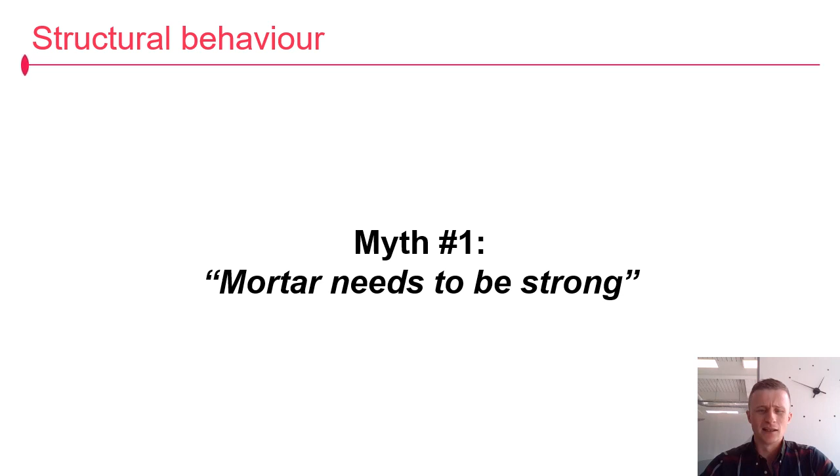Structural behaviour. I want to debunk a couple of myths along the way. So myth number 1, the mortars need to be strong. Okay, engineers, I am aware, get a bad name for this in the conservation business. Now, I want to draw the distinction between the structural behaviour of old buildings and new buildings. Old buildings draw strength and stability from their shape and mass. So in response to destabilising forces, it's just their weight arranged into a stable form that's keeping them standing up.

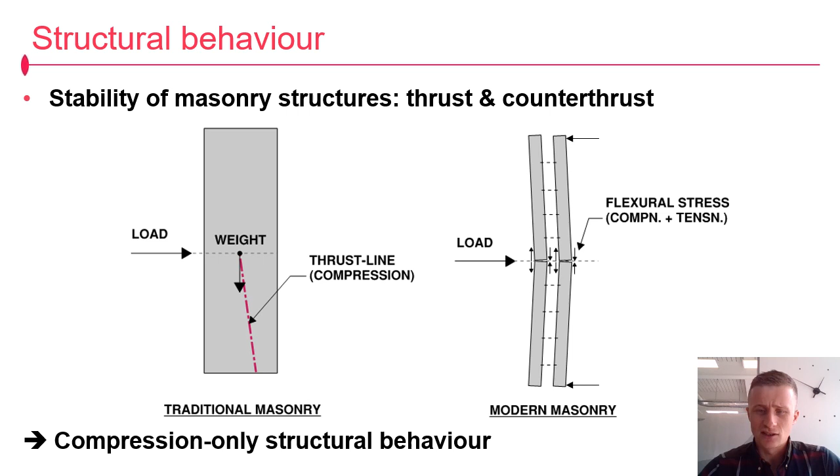Okay, so the internal forces are all compression based. No tension, no flexural stress. Distinction with modern masonry buildings, essentially the walls work like thin reinforced concrete slabs on their side. So in response to destabilising forces, they need to develop tension across the mortar joints to create flexural resistance. Okay, so the role of the mortar joint is totally different from old buildings to new buildings. Old buildings just to keep the bricks apart, whereas in new buildings it's to stick the bricks together. Okay, so big distinction in the role of the mortar joint.

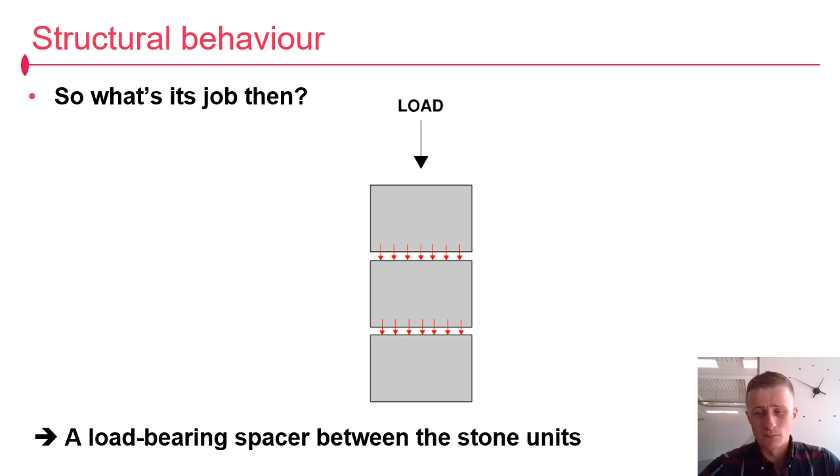So if it's not sticking the bricks together, which it absolutely is not, it's just a load bearing spacer between the stone units to prevent them from point contacting one another and splitting. Okay, now traditional lime mortar, spectacularly weak, of the order of 1 to 2 Newton per square millimetre. That's for our friends across the pond, that's somewhere between 150 and 300 psi. Okay, so low strength, which sort of invites the question, with such low strength mortars, how are our old buildings standing up?

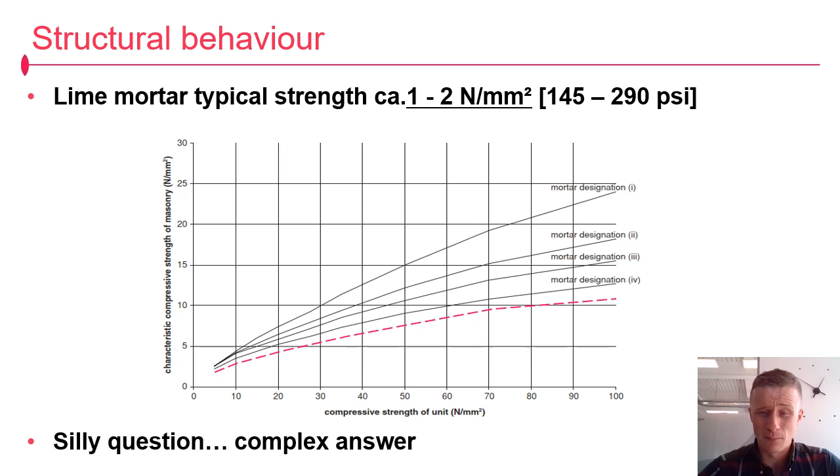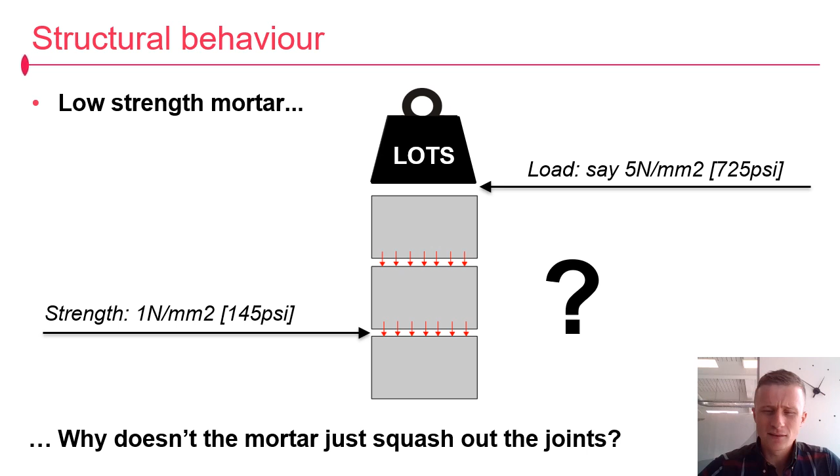Now, when you look at the strength curves for the code of practice for load bearing masonry, you'll find that for a weak mortar, you can get very strong masonry as an overall assemblage. And the wee pink one is what I've idealised for what a traditional hot mixed lime mortar might be. Now, you'll find that for very weak mortar, you get ample strength out of your masonry, and you're thinking, where does this come from? So when you look at the stress transmission across the mortar joints, you're thinking, okay, well, if my mortar's only good for 1 Newton per square millimetre and I load it up with 5, why doesn't the mortar just squash out the joint? It's a silly question, but it's got a complex answer.

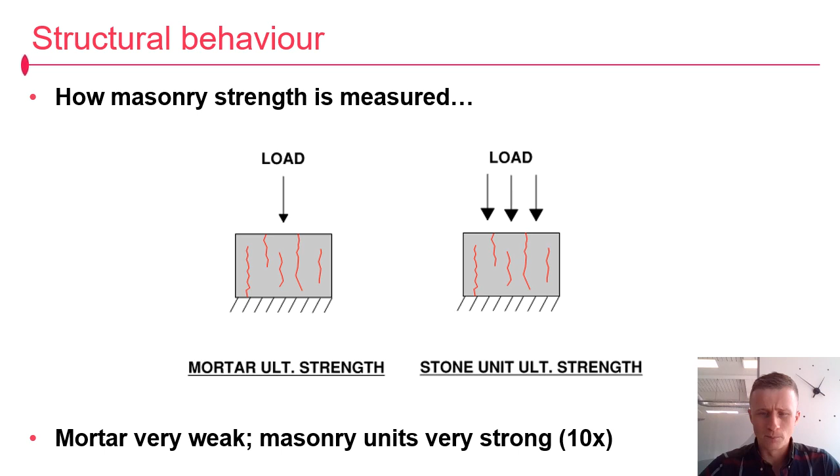Now, it pays to look at how the strength of masonry is measured. So if you cast a cube of mortar and load it up in a crushing rig, as it approaches its ultimate strength, it tears itself into vertical strips. And those vertical strips are wee side-by-side columns that then buckle. And when they buckle, it collapses. And that's the ultimate strength reached. Stone masonry units, similar process, but it's significantly higher strength. You're talking a clear order of magnitude between mortar and masonry unit. So, but it's a bit more complex than just the dilution of a weak material with a strong material. Like I said, the stress transmission through the joints, you're thinking, where does this go?

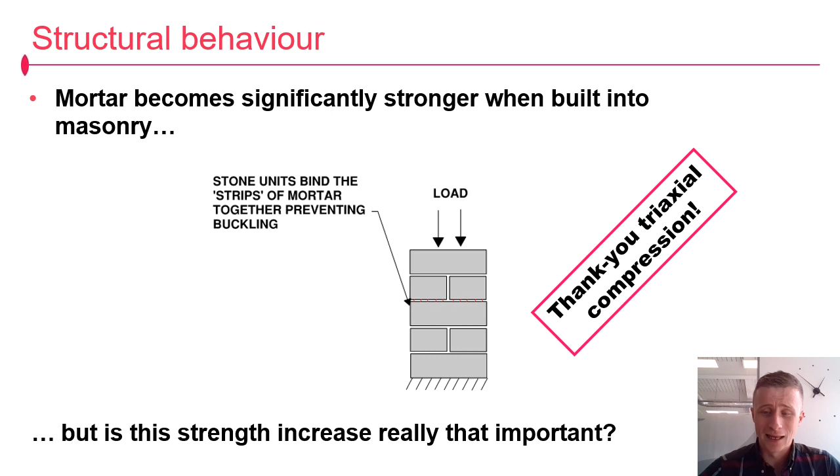Well, when you actually build mortar into masonry, the actual mortar strength in practice significantly increases, because each masonry unit laterally binds or clamps together the head of those wee columns that are trying to form, so they can't buckle. So the mortar is actually in a state of triaxial compression and can support significantly higher strength. So you can get very high strength masonry out of very low strength mortar. Okay, now, but is that high strength actually required?

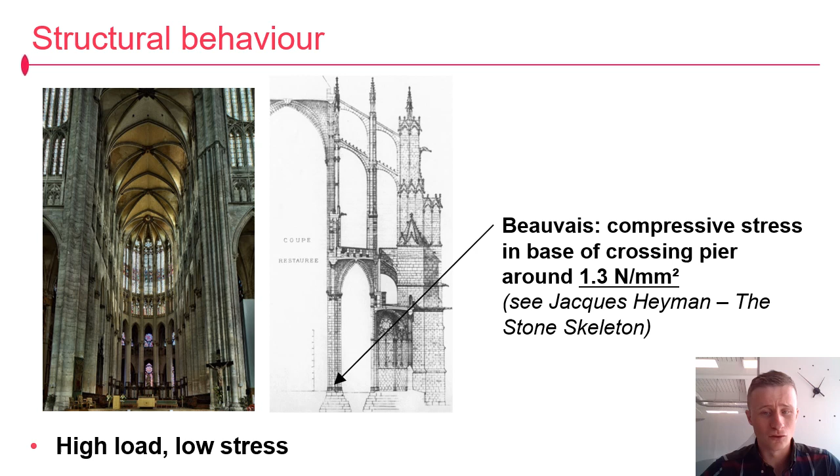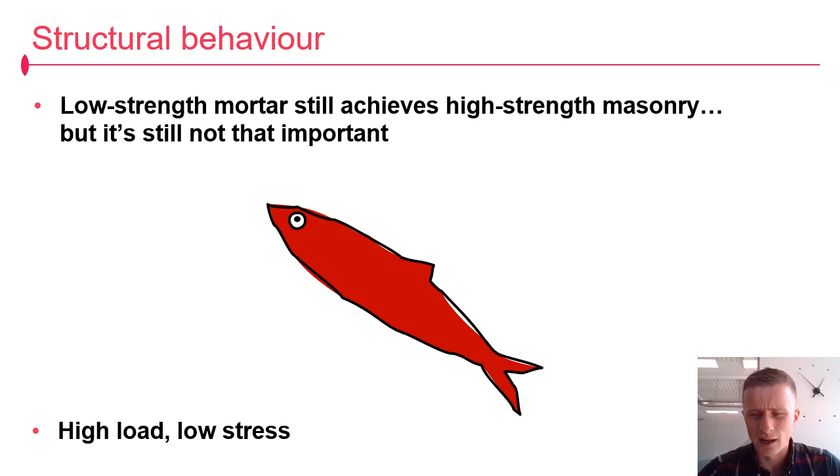Well, Gothic cathedrals are about as far as you can push load-bearing masonry as a structural material, and still, even in the highly loaded members like crossing piers, you're talking mean compressive stress very low, of the order of round about 1-2 Newton per square millimetre. So high load, low stress, thanks to the massive section area. Now, so you can get high strength masonry out of low strength mortar, but as we've seen, high load, low stress, thanks to the massive section area, strength still isn't that important. So it was a bit of a red herring to make the point. Okay, what is important about the structural behaviour of the mortar joints is its deformability. So that's the deformation modulus.

So the mortar is essentially a deformable cushion to allow the stonemasonry units to shuffle about to cope with nothing short of wanton destruction to the foundations. If you ever get the chance to visit our island, go to Carlisle Cathedral. It's an engineering playground for how arches work, and you can see the role of the mortar is essentially a deformable filler to keep the stones apart so that they can shuffle around to a stable form.

So from a structural engineering perspective, structural masonry is Lego bricks bedded in plasticine. So strength's not really that important. That's me, an engineering pariah now. The cat's out the bag, and I will be looking for new employment sometime soon.

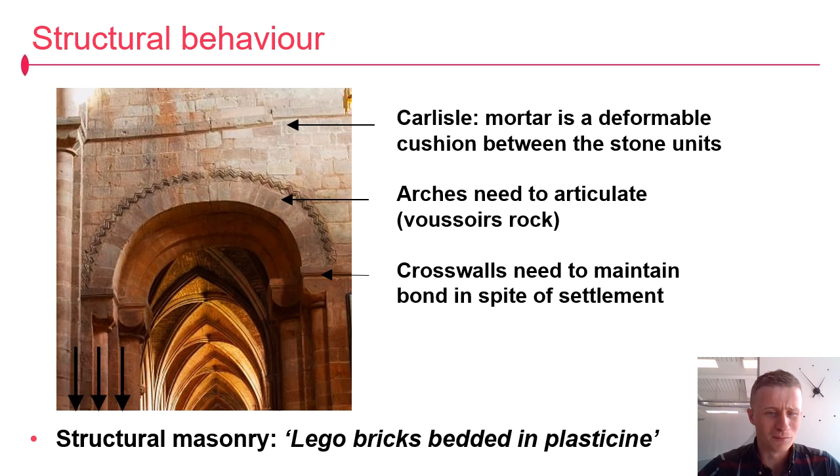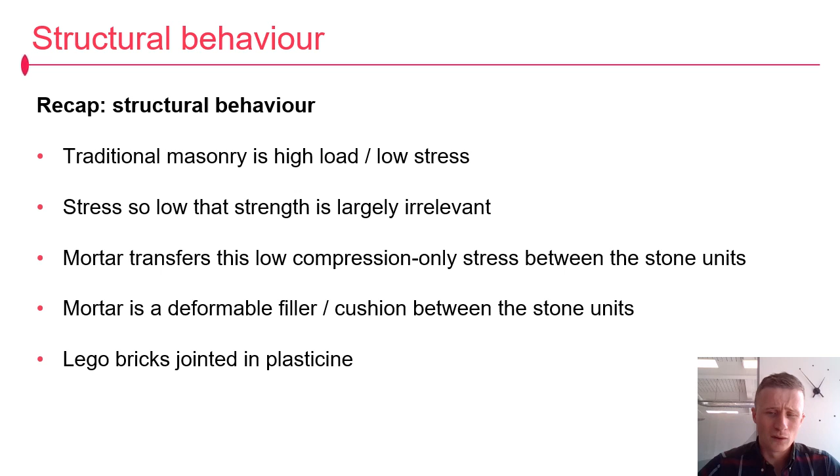So a quick recap on the structural behaviour. So traditional masonry: high load, low stress, stress so low that strength is a bit of a red herring, and we're looking at Lego bricks jointed in plasticine from a structural behaviour perspective.

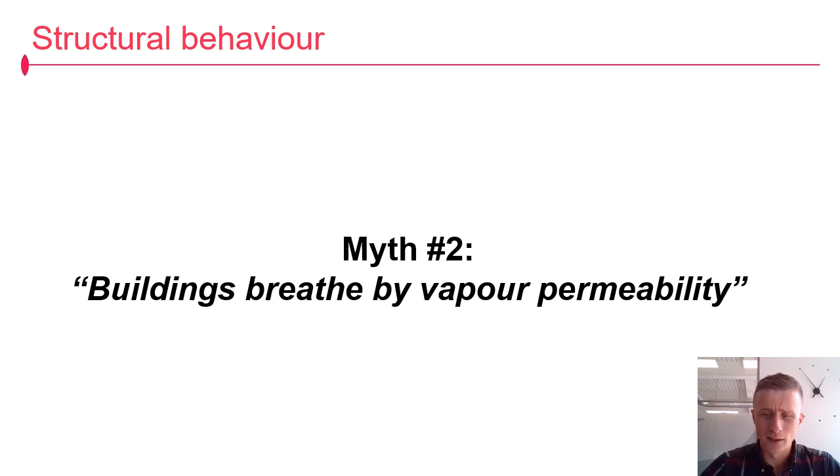Okay, weatherproof behaviour. So another myth that I want to debunk is that old buildings breathe by vapour permeability of the walling fabric. Vapour permeability is a terrible way of describing how old buildings breathe. I'll come back to this. So the small business of keeping the water out.

Now, I can only speak for us here, but as you might imagine, I'm from the west coast of Scotland. That's the dark blue bit there. When walls get wet, you're talking of the order of tens of tons of water every year incident on our masonry building walls. So that's a lot of water, and it's got to go somewhere.

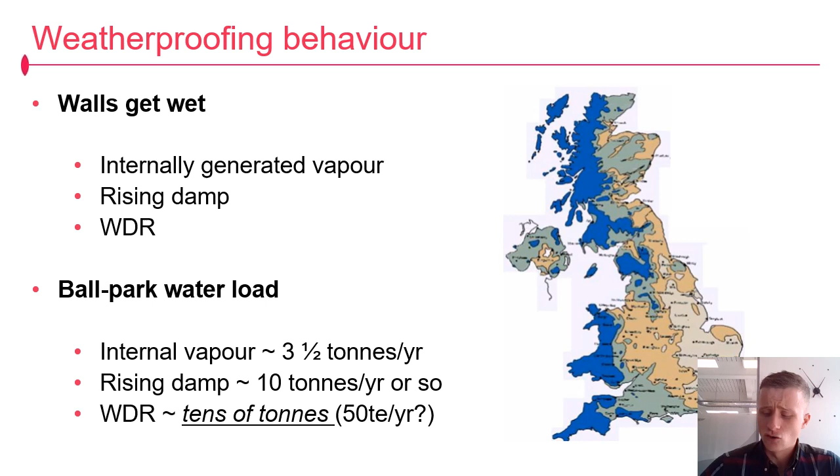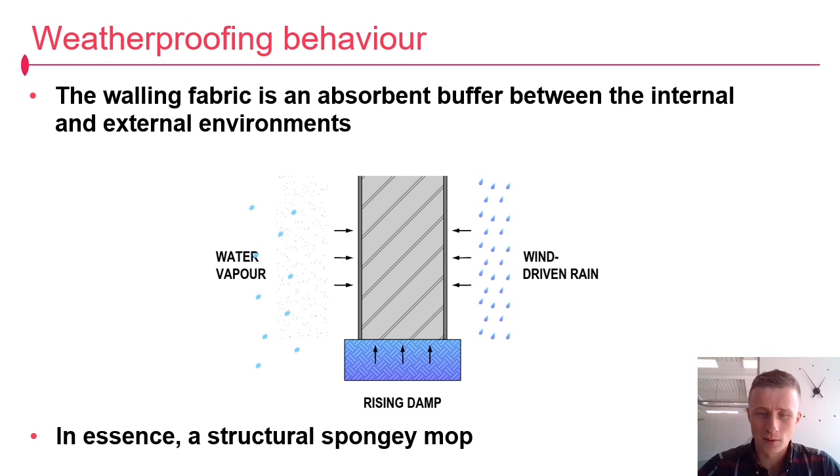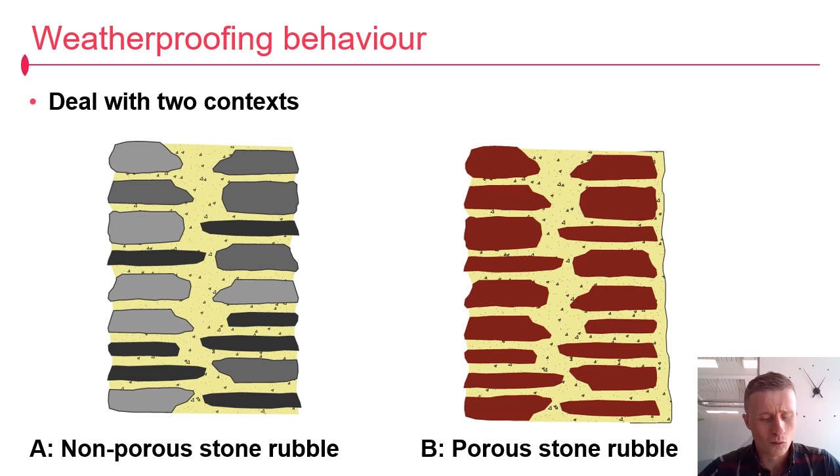Now, the walling fabric is essentially an absorbent buffer between inner and outer environments. So that's a thick mop to absorb, store, and discharge the water out to the external environment when conditions permit. It's that recharging cycle that I'm interested in here. So I'm going to deal with two contexts. Context A, we've got non-porous stone masonry, so granite rubble wall, bedded in traditional lime mortar. In context B, similar stone rubble wall, but with porous masonry units, so sandstone for talking sake.

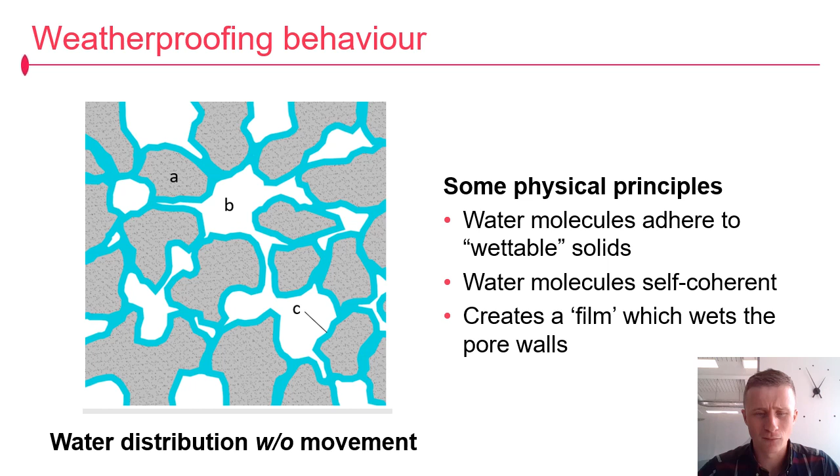Now, if those marbles were also attracted together, then you're looking at water molecules, so they're self-coherent, they're attracted to one another as well. Those two physical principles compete, and if you chuck a bucket of water on a block of dry sandstone, you'll find that the water tries to wet as much internal surface area as it can, so that's adhesion, whilst maintaining intermolecular connectivity, so cohesion. The outworking of that is it creates a film across the pore walls. At high moisture contents, that's a thick film. At low moisture contents, it's a thin film, but it tries to stay interconnected. Introduce a drying front to this and watch what happens.

So the principal driver behind the drying of wet stuff is wind blowing across the surface. Okay, so wind blowing across the surface physically removes water molecules from the front of the material. That opens up a bit of free space of wettable solid surface. The next magnetic marble in the queue bumps forward to stick to that, but because he's coherent to his pal behind him, he bumps forward as well, sticking to him, and the whole chain of marbles starts to roll through the material towards the drying front. That's capillary drying, okay, non-saturated capillary flow towards a drying front.

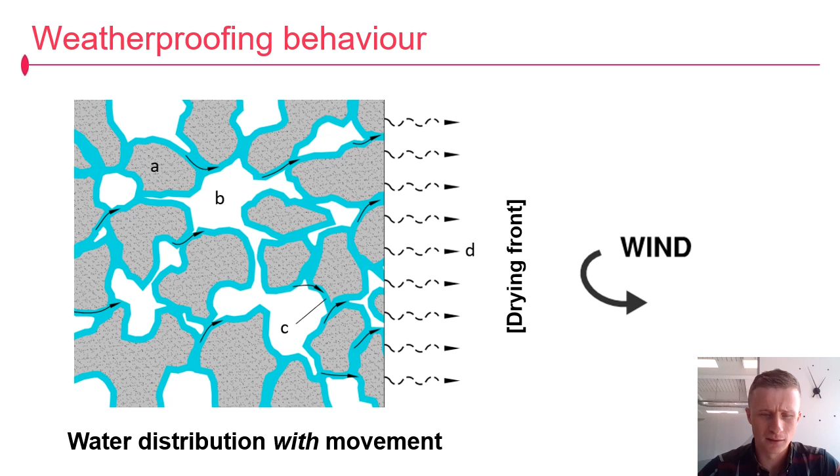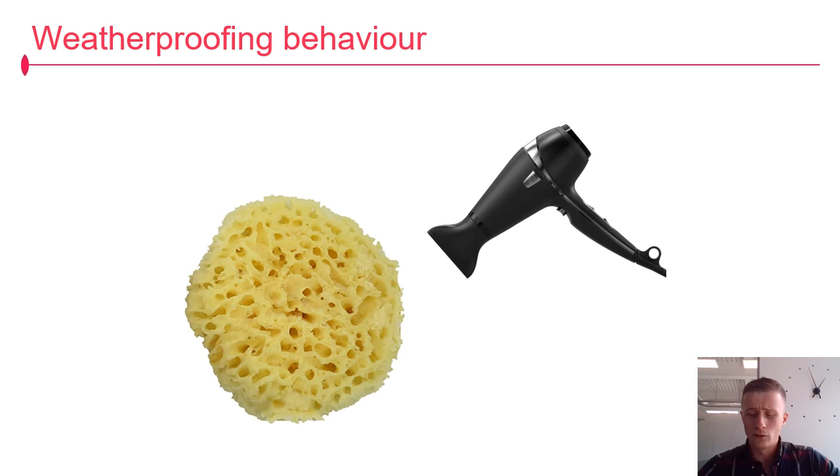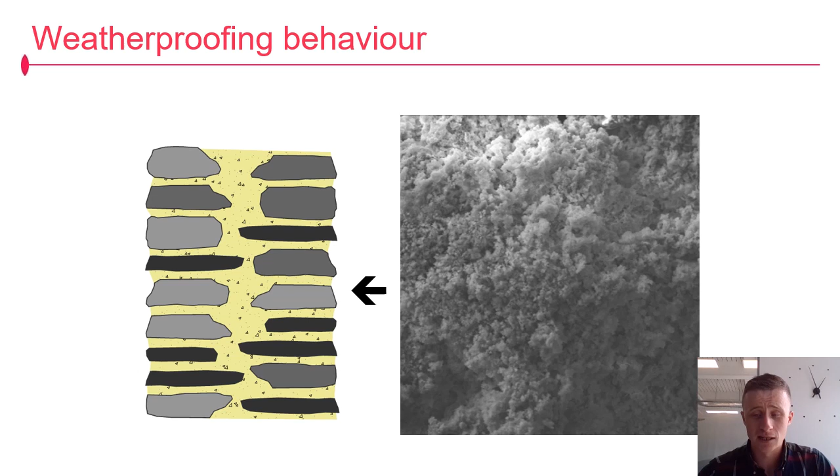In other words, you take a wet sponge and blow a cool hairdryer across the surface of it, you'll find the whole sponge dries out, not just the surface, and that's because you get capillary flow through the material. When you look at lime mortar on a powerful enough microscope, it looks suspiciously like a sponge. So essentially you've got a load-bearing structural sponge built into the wall with a cold hairdryer blowing across the outer surface. That's what's happening. Non-saturated capillary flow, convective drying.

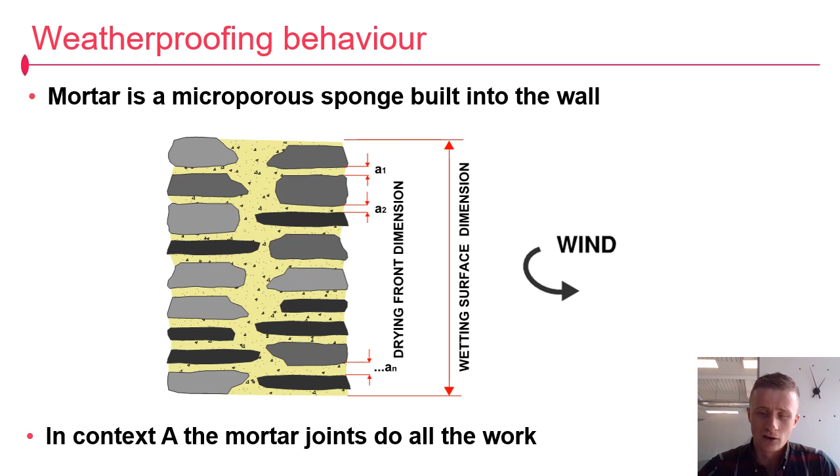Now, the wall gets wet according to its total area, but it can only dry in this context according to the total surface area of the lime mortar joint. So the lime mortar has to work hard, so it needs to be thick enough to store all that water, and then work hard to discharge that water out to the external environment. Scenario B, a sandstone wall with a good lime harling.

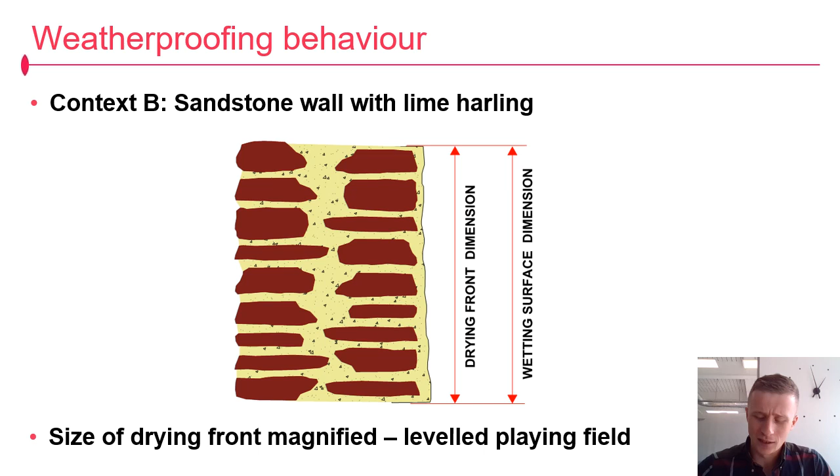So you've now levelled the playing field between the propensity of the wall to get wet and its ability to dry back out. So significantly enhanced the drying capability. But there's more going on there, so we'll probe poultice mechanics in a wee minute. But essentially, a fine pored material will soak water out of a coarse pored material into itself. So that's like drawing the body of water out of the coarse pores into itself, closer towards the drying front. It also keeps the coarse pored material drier for longer.

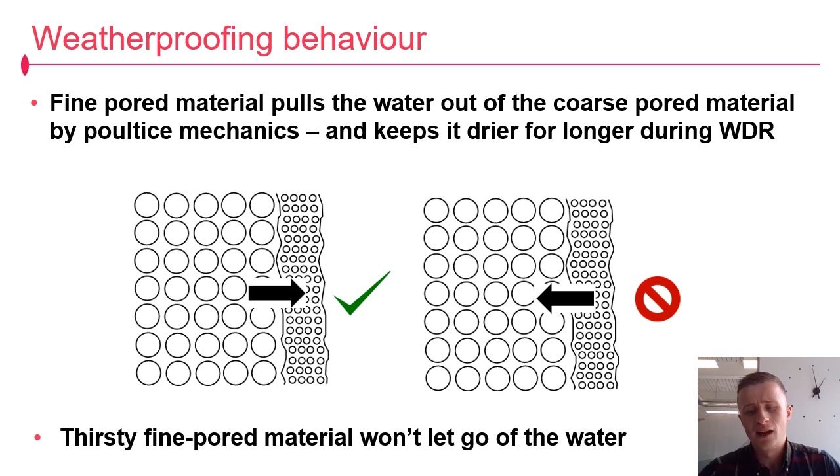If you cover a coarse pored material with a fine pored material, the fine pored material is the one that's getting wet, and it doesn't want to let go of the water into the coarse pored material, by those same poultice mechanics. So it's right at the front of the material when the wind keeps blowing but the rain stops, ready to dry back out. So harling, the prime culmination of poultice principles, is key.

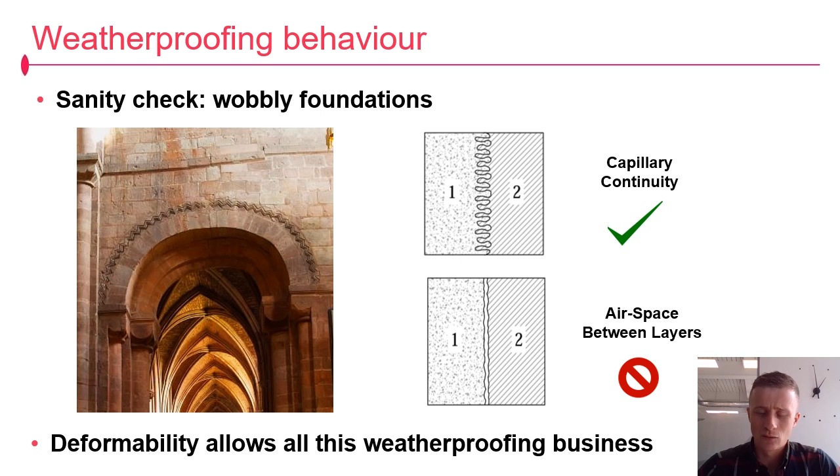Now, this weatherproofing business is intimately tied to its ability to deform. So the mechanical characteristics and the weatherproofing characteristics are intimately linked. Okay, so you need to maintain capillary continuity between your stones and your mortar and throughout the body of mortar for all this business to work properly. You do not want a brittle material between your stones, because that will snap and create airspace, which massively impedes the water movement through the material.

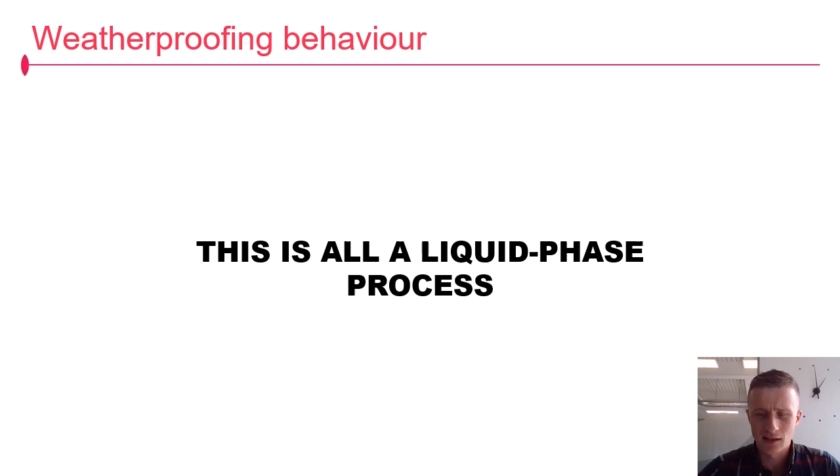Now, you'll notice this is all a water movement process, liquid phase. It's not a vapor phase process at all. Now, the business of vapor permeability is an absolute nonsense. It's a terrible way of describing how old buildings breathe. Old buildings breathe by convective drying.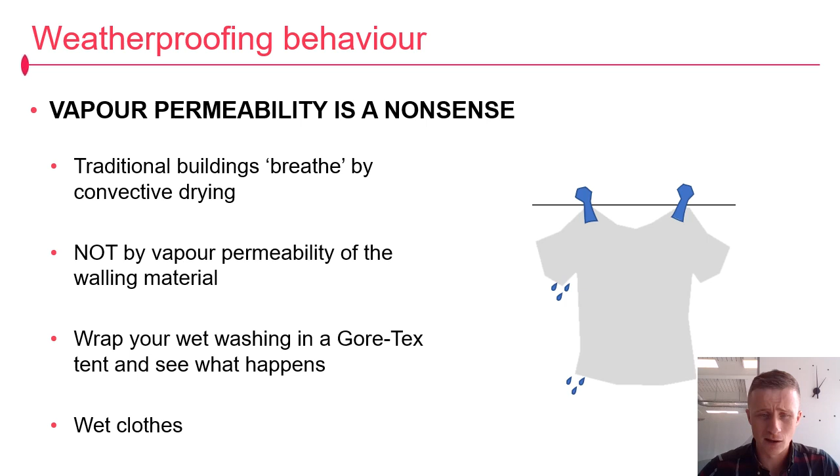So the proof test of this is if you take your wet clothes out of the washing machine, hang them up on the washing line, and for academic purposes decide to erect a Gore-Tex tent around them, what would you find? Well, Gore-Tex, fantastic material for hill walking and so on and so forth, waterproof, but it's windproof. And whilst it's highly vapor permeable, because it's windproof, it starves the wet material of access to the favourable evaporation conditions, i.e. inhibits the wind flow blowing across the surface. So lo and behold, wet clothes. Any backpacker knows that it's really difficult to get your wet kit to dry on the inside of a tent.

Okay, so quick recap on weatherproofing behaviour. So solid wall, just an absorbent buffer. It's a holding tank, a spongy mop to soak up, hold and discharge the water out. And it does this in a convective drying capillary flow, not vapor permeability. Okay, harling being the prime culmination of that process.

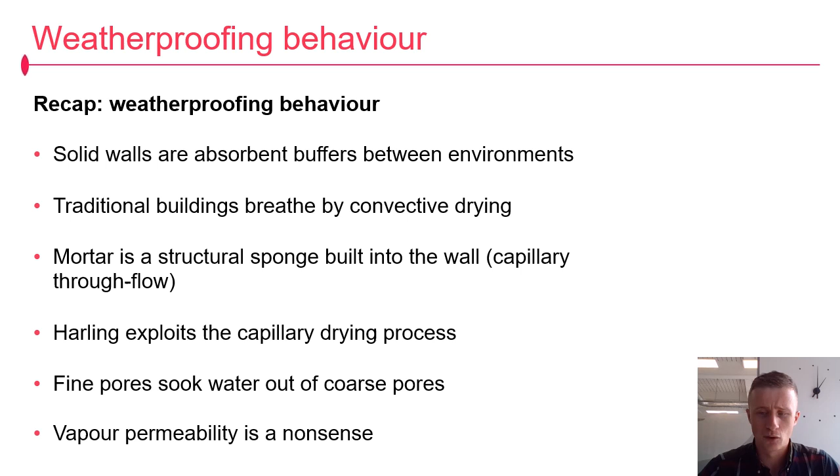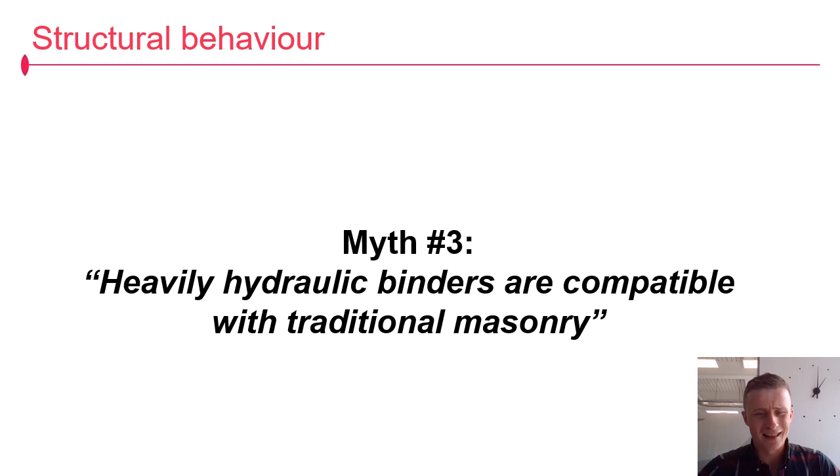Okay, sacrificiality. Now, this is the masonry conservation holy grail. Now, another myth I want to debunk here is that heavily hydraulic binders are compatible with traditional masonry. Okay, so lime mortar is grappling with moisture, the engine of decay, but how does it preserve the stone masonry units? Now, in the UK, the principal agent of decay is salt attack, not frost attack. Now, salts are harmless in solution, but when the body of water that the salt's dissolved in then evaporates is where it causes its damage.

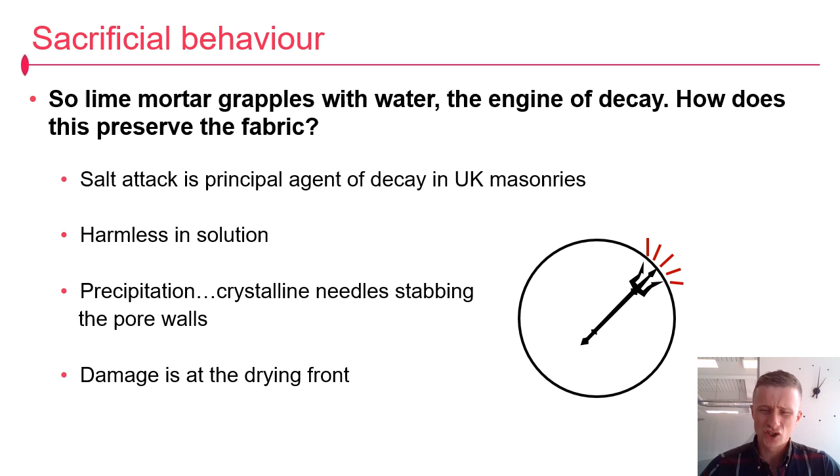So the salt ions crystallise and create wee needles, like wee spears, stabbing the pore walls, breaking down that mineral binder, essentially turning an engineering strength sandstone into mush you can poke your finger into. So it's a big problem. Now, the SPAB had a key insight into this. That's the Society for the Protection of Ancient Buildings.

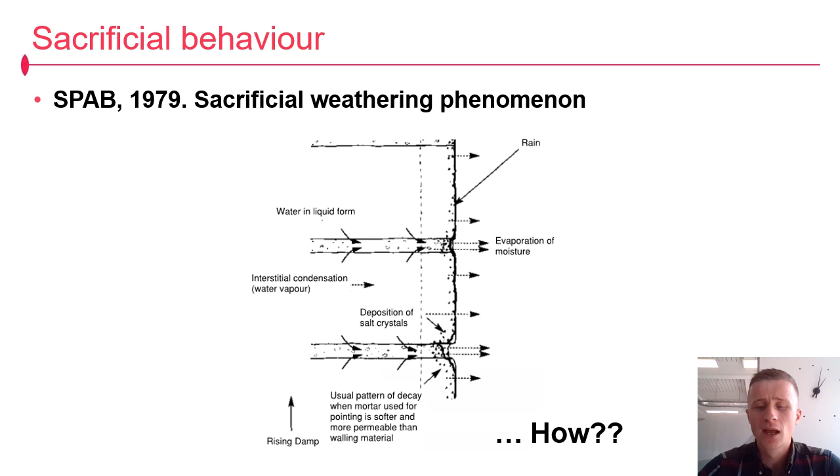In 1979 they published their findings on observations of masonry structures as they dried after periods of wind-driven rain. They noticed that the lime mortar joints appeared to soak the water out of the masonry units and into the lime joints, where the bulk of evaporation took place, and then lo and behold, that's where the salt crystals were deposited. The Eureka light bulb went on, penny dropped, and this was dubbed the sacrificial weathering phenomenon. How does this work? Okay, so when you've got two porous materials of distinctly different pore size in intimate contact with one another and chuck a bucket of water on that, you have a poultice.

So water is preferentially drawn out of coarse pores into fine pores by those same capillary mechanics we've seen earlier on. Okay, now, with the moving water come the soluble salts, and this is mobilised by wetting and drying cycles, and we get those several times a day on the west coast of Scotland. And over the lengthy lifetimes of masonry structures, you get an incredibly pronounced salt management process.

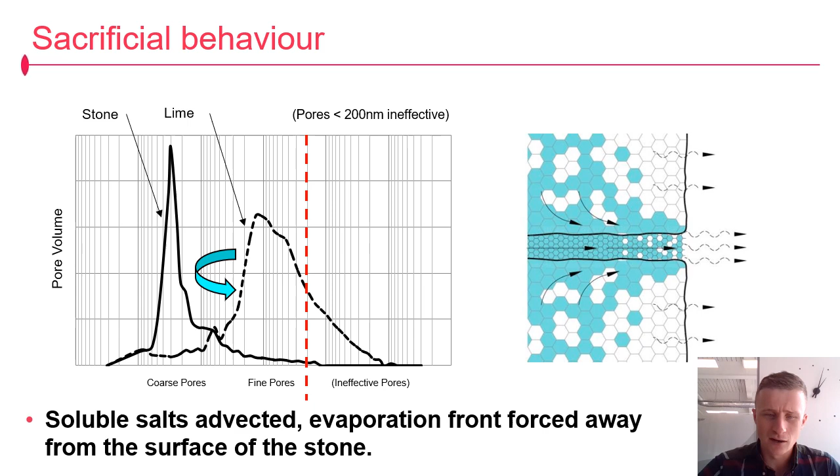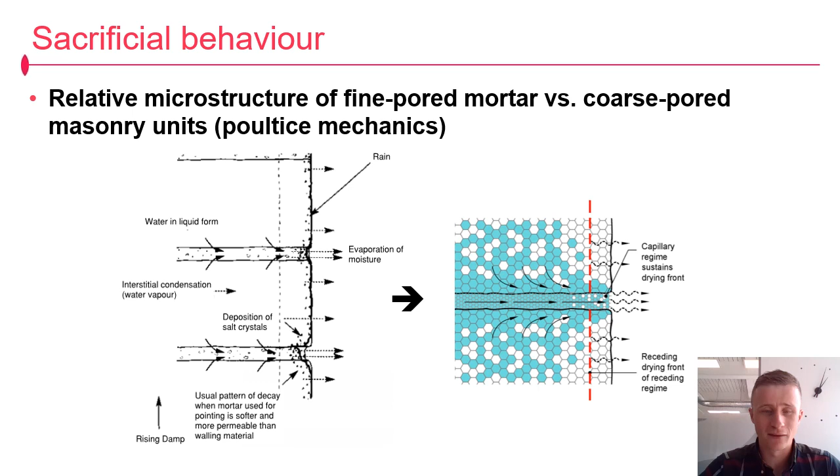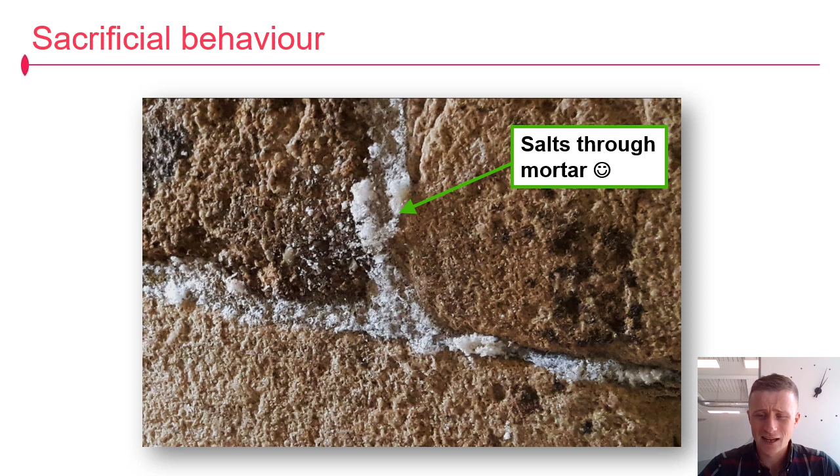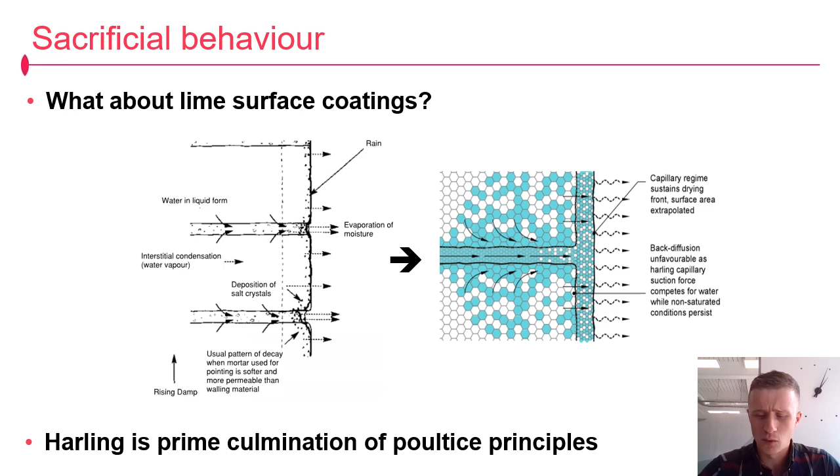This is sacrificial weathering caught in the act. Okay, and if that much was true for the bedding joints, how much more true would it be if you just extrapolated that across the full surface area? So traditional lime coating, prime culmination of poultice mechanics. And it's plain to see the drying out capability of a good lime harl versus some nasty cement that we've been inflicting on our cultural heritage for the last century.

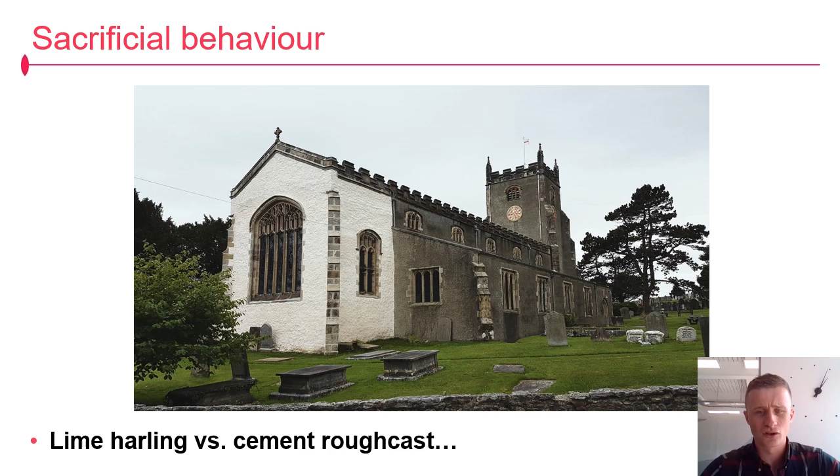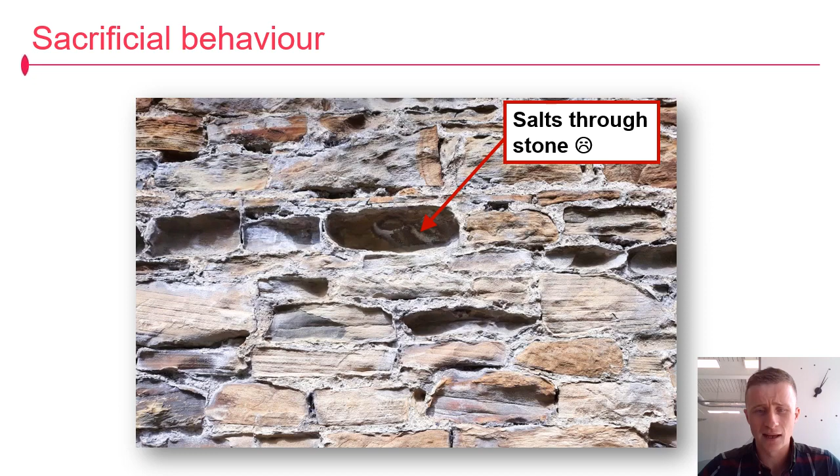Now, the reverse weathering process is why cements and other modern materials cause such damage. The salt evaporation is forced into the stone masonry unit, where the salts are deposited and you can turn it into mush. We've seen this at Glasgow Cathedral. What you've got here is a pore size distribution spectrum of three materials in this wall. You've got your sandstone on the left, that's your coarse pored unit. You've got your traditional lime mortar from the back of the bedding joint, that's your fine pore, and you can see there's a distinct difference in pore size, so it's a very effective poultice for pulling the water out of the stone into the lime.

With the moving water go the soluble salts, but that's plugged with a very nasty cement mortar. Now, you'd think the cement is again smaller in pore size than the lime. Why doesn't it just pull the water into the cement? Well, capillary flow only occurs down to a certain pore size. By the time you get beneath 200 nanometres in pore size, capillary flow grinds to a halt, and that porosity is completely ineffective for water transport purposes. So rather than being a poultice, it's just a plug holding the water in the joint.

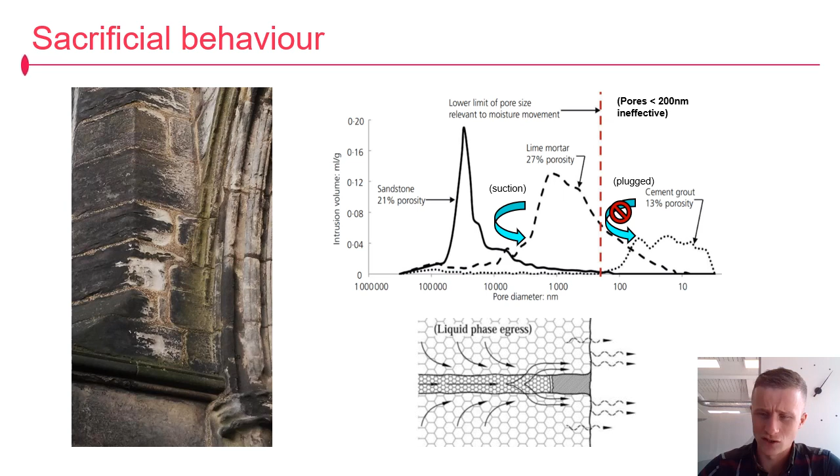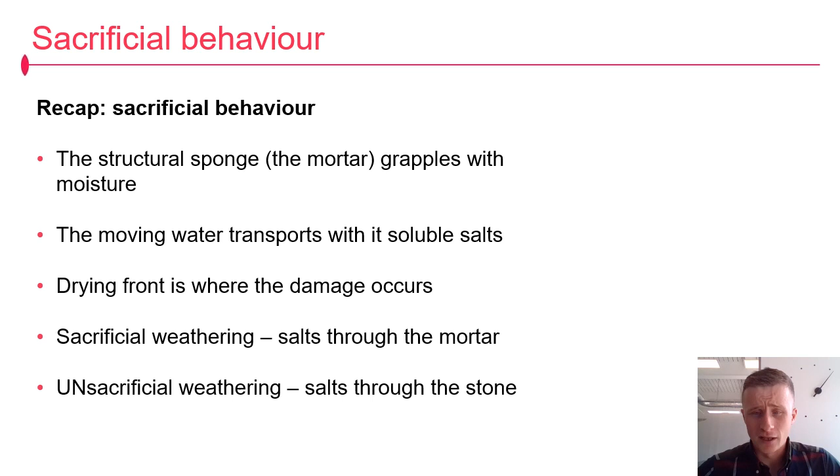So what you can see is the mechanics of the drying behaviour around the joint, shown at the bottom: the fine pored bedding mortar soaking the water out of the stone, but it has to evaporate through the stone arrises to get around that plug, and that's why your arrises are weathering preferentially relative to your bedding and the surface of the stone. Okay, quick recap on sacrificiality. The sacrificial behaviour of the lime mortar is a direct outworking of its weatherproofing behaviour. The water management of the mortar is an outworking of its microstructure, and with that moving water come the soluble salts.

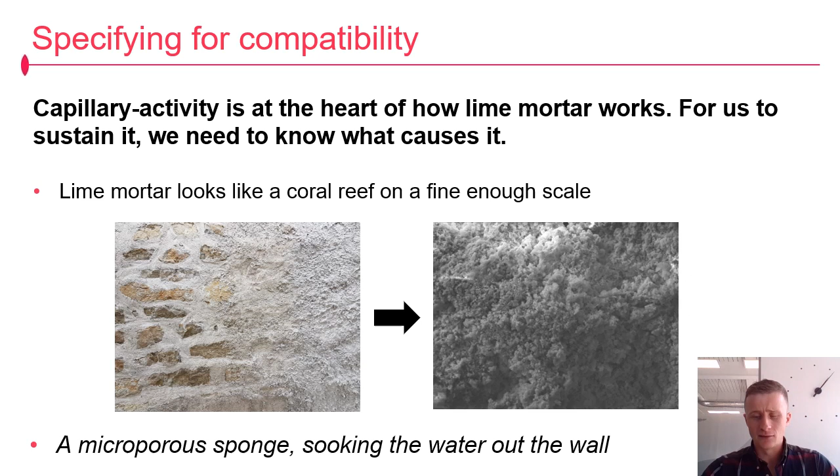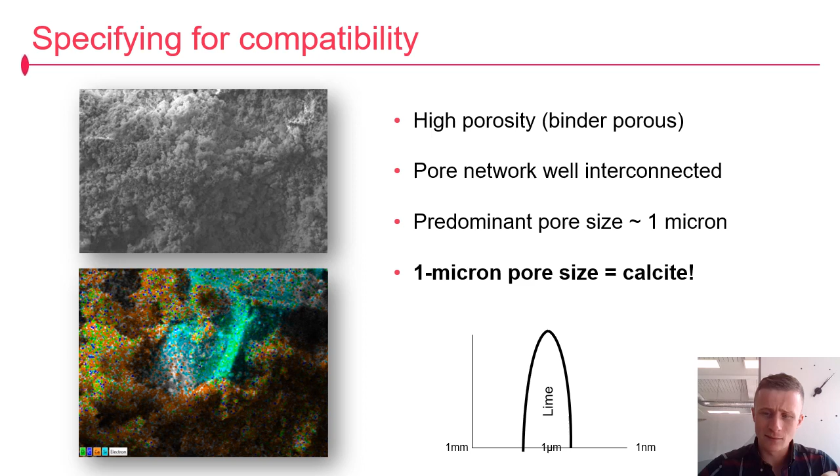Now, how can we replicate this process? When you look at lime mortar on a fine enough scale, it is essentially a sponge, a coral reef looking thing through a powerful enough microscope. That's a sponge soaking up the water and drawing it out of the wall, and with the moving water come the soluble salts. What creates that sponge? When you look at it through an EDX microscope and identify the minerals at work, what you're looking at is calcite, that's carbonated free lime, in the mortar mix creating this optimal spongy microstructure. We need to replicate this mineralogy of our binder if we're going to create that sponge in our mortars today. So we need to do this by targeting an air lime or a feebly hydraulic lime to create that calcium carbonate, which creates that sponge.

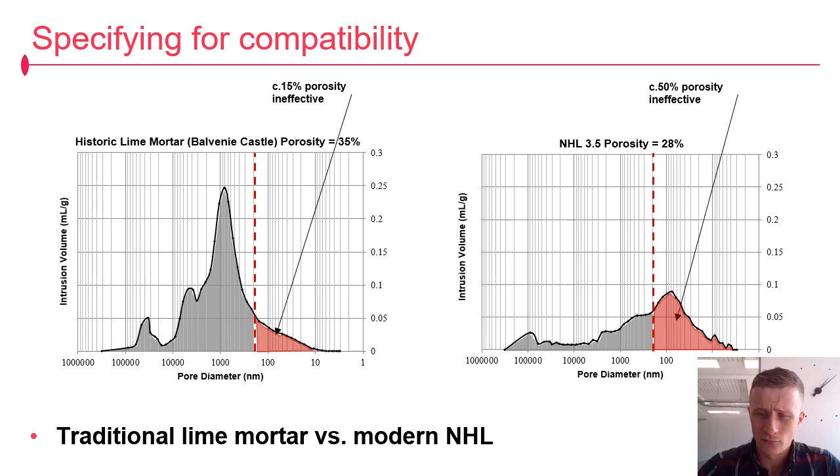I don't have time to go into the difference today, but there's a big distinction between your authentic traditional hot mix lime mortar you see on the left from Balvenie Castle. It's fine pored, the pore size distribution centred around that 1 micron pore size. So you set that next to a coarse pored masonry unit, and it's clearly a very effective poultice, very effective for capillary drying. So it's doing all that moisture management and your sacrificiality business, and that's the ideal blueprint. Whereas compare this with an NHL: lower porosity, but the pore size of that porosity is the problem. So it's largely ineffective for capillary transport processes and is not as effective a poultice. So, a big distinction between traditional lime mortar and NHLs.

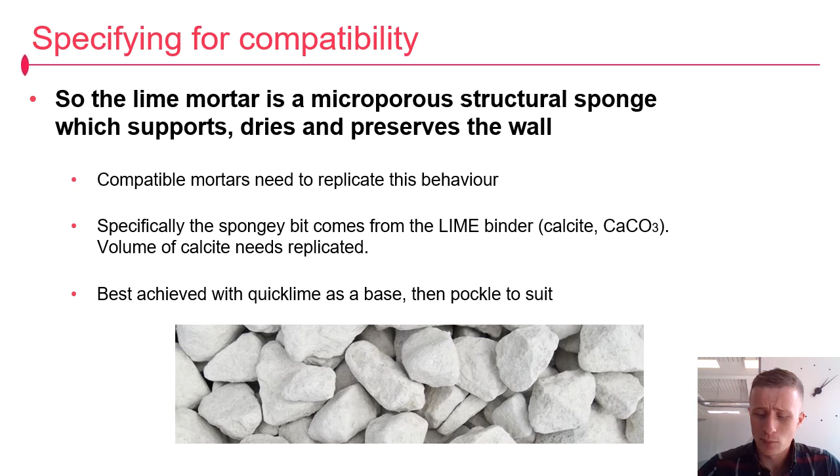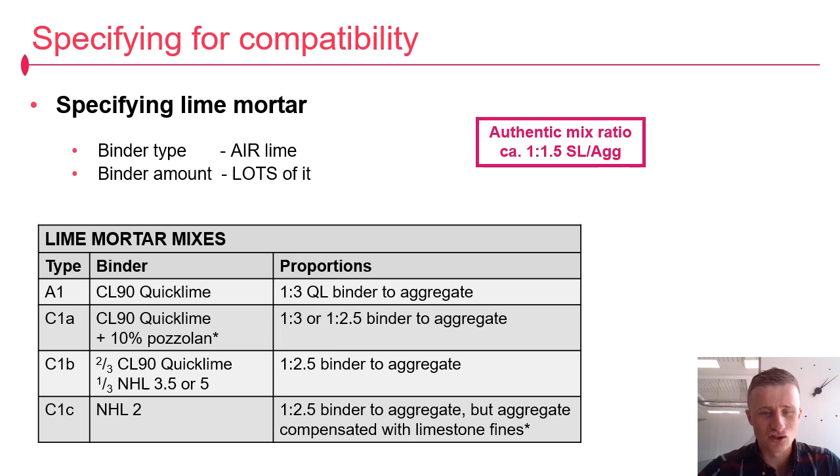So we need to be starting with quicklime as a base, using a lime-rich binder type, so that's quicklime, non or feebly hydraulic in binder type, and then use it in traditional binder amount. So binder type and binder amount issues. And you can look at some sample specification types at your leisure.

Okay, to sum up, we broke down how lime mortar works into three constituent parts. Part 1, structural behaviour. Strength is a bit of a red herring, it's deformability that's the key. Part 2, weatherproofing behaviour. We looked at how lime mortar grapples with moisture, and that is a capillary drying process. Liquid phase, vapour permeability was a nonsense. And sacrificiality is a direct outworking of that behaviour. We see that the lime mortar is essentially a permanent poultice built into the wall. And this is best replicated in practice by specifying an air hot mix lime mortar, or non to feebly hydraulic if we need it.